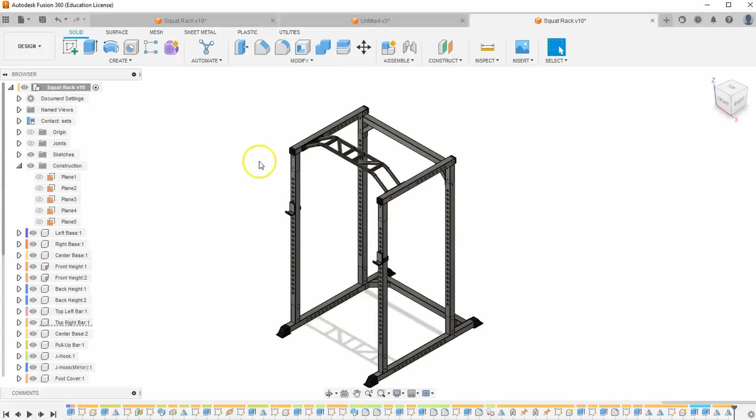Now, before we get started and just start building a bunch of bolts and nuts, if we check our PDF, it actually tells us the exact size of the bolts we need. We need M10 bolts. And we don't have to make that. We can just insert it. So let's go to Insert. And let's go to McMaster-Carr Components. And let's select Screws and Bolts.

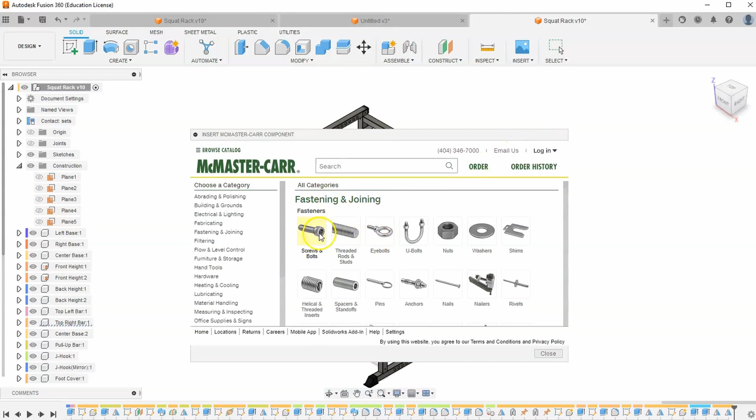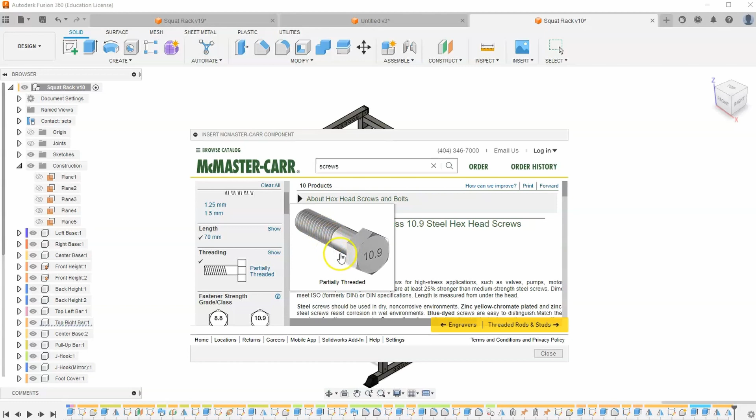And scroll down to Hex Head Screws and select Metric. Then we can just select M10. For the length, let's select 70 millimeters. And we're going to select partially threaded because we don't need threads all the way through, only at the end. And then let's just select the first one we have. And make sure the type of file that we download is a 3D step file, not SolidWorks. And hit download.

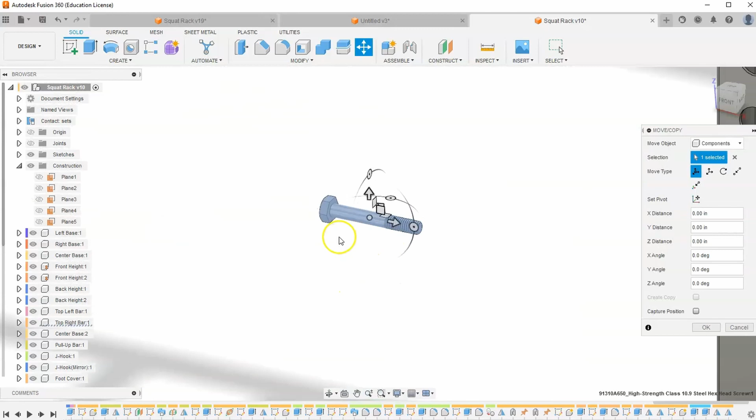And the file automatically inserts, and it is built correctly. Hit OK. And so then I'm going to go to Joint, and I'm going to select this end of my circle, and I'm going to place it in one of the holes here. And let me go around to the other side, actually, right here.

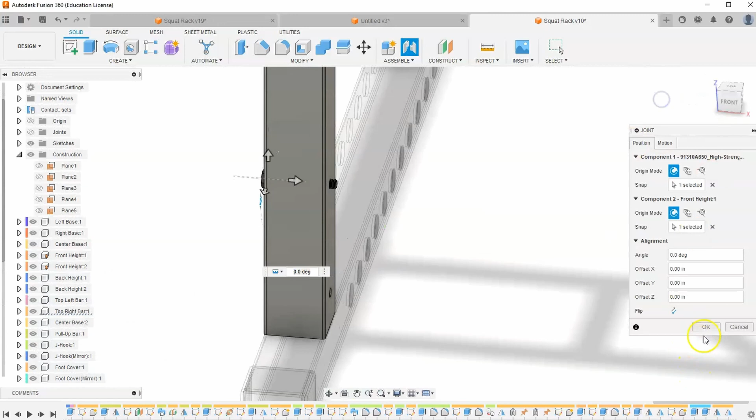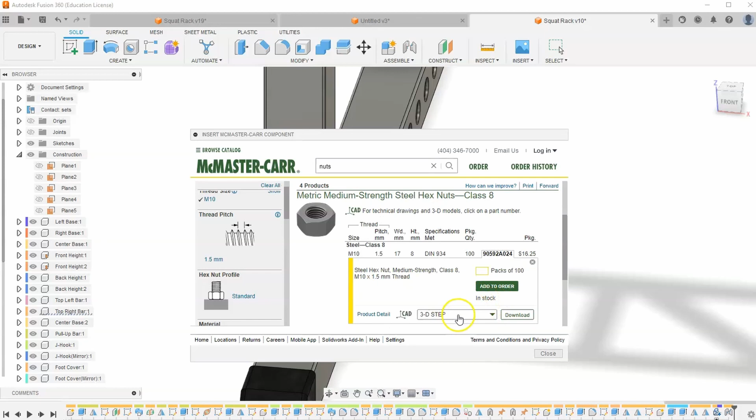And hit OK. And then we need the matching nut, so let's go to Insert, McMaster-Carr Components, and let's go to Nuts, and Hex Nuts, Metric, once again M10, and I think we can just select the first one from here. So make sure it says 3D step and hit download. And then the same thing, just hit OK and go to J on your keyboard for joint and just select that center circle and select the center circle here as well. And hit OK. And so we have the first one.

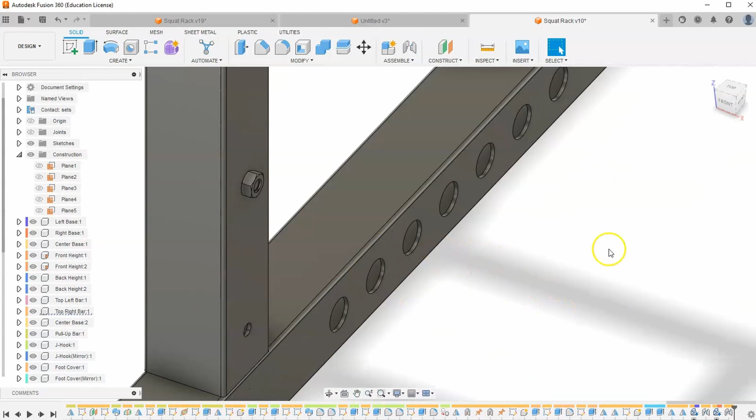And instead of doing that over and over again, let's go to Move Copy. And let's scroll down to these last two components in our browser and select them both by holding Control on your keyboard. And then make sure you select Create Copy. And then grab that up arrow and drag it down -5 inches. And hit OK.

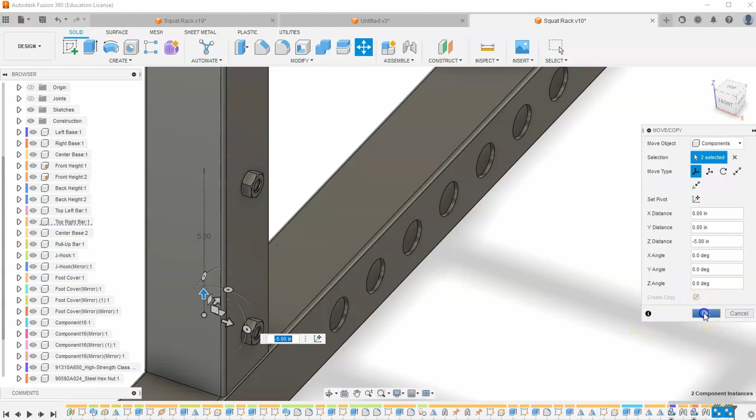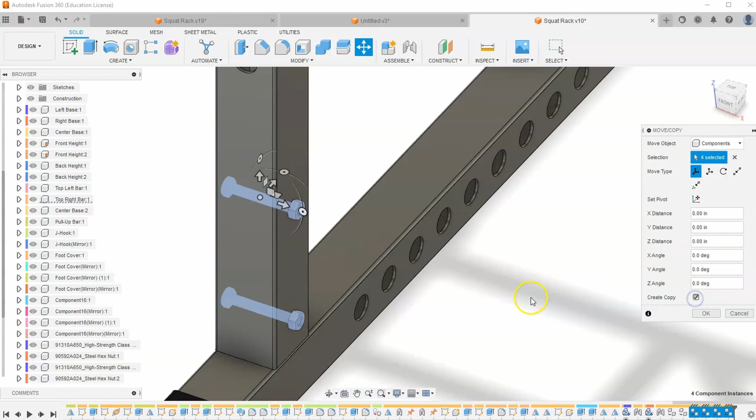And then scroll down a little bit more in your browser, and we can just select the bottom four by clicking the first high strength, holding Shift, and selecting the very bottom. And it should select all four. And once again, hit Move Copy. And once again, select Create Copy before you start moving. And if you don't hit Create Copy before you start moving, you have to start over. It won't let you create a copy after you started moving it. You just have to hit Cancel and then hit Move Copy again.

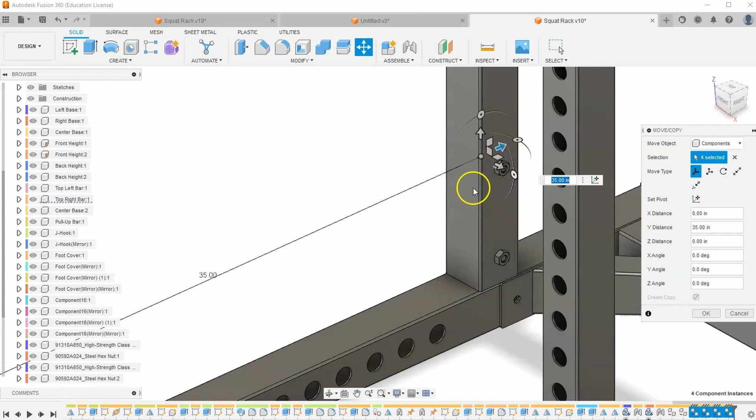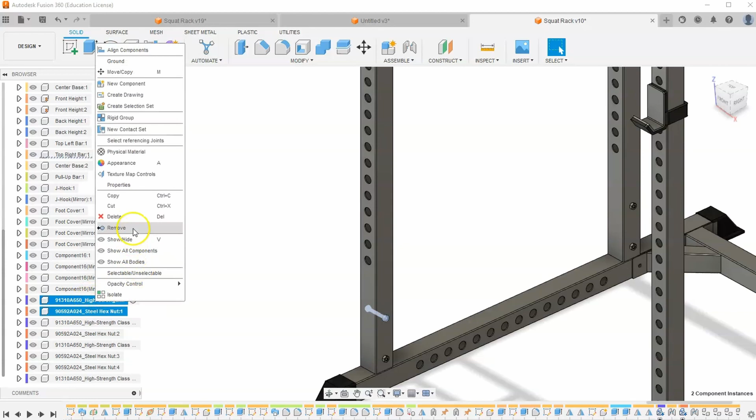But we drag it to the right here until we hit these holes, and that distance apparently was 35 inches. And hit OK. And then what else? Well, we also want some up here for here and here. So we can do that real quick. But the move copy is going to be a little bit complicated. Let's just select a bolt and a nut randomly here. So I'm just going to hold Control and select both of these. Right-click, Copy. And then I'm just going to right-click, Paste. And let's drag it out and hit OK.

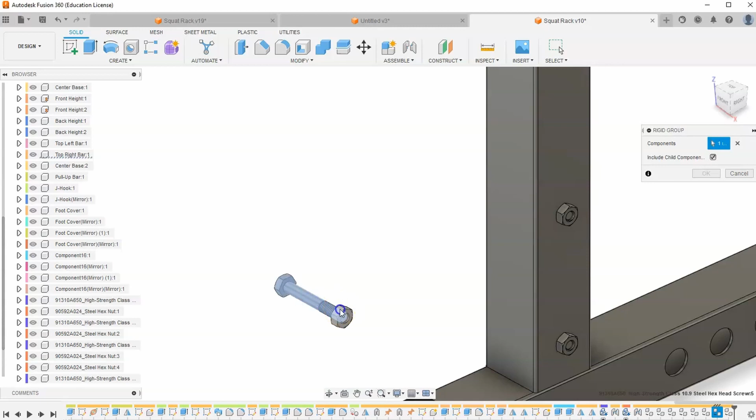And then I want to keep these two together. So how I'm going to do that is I'm going to go over to Assemble and select Rigid Group. And I'm going to select this bolt and this nut so that they're always stuck together, forever and always. And hit OK. This way, if I move it, they move together. I'm going to hit Revert. And I'm going to go back to Assemble, go to Joint, and I'm going to select that circle. And I'm going to tell it to insert right here at this circle. And hit OK.

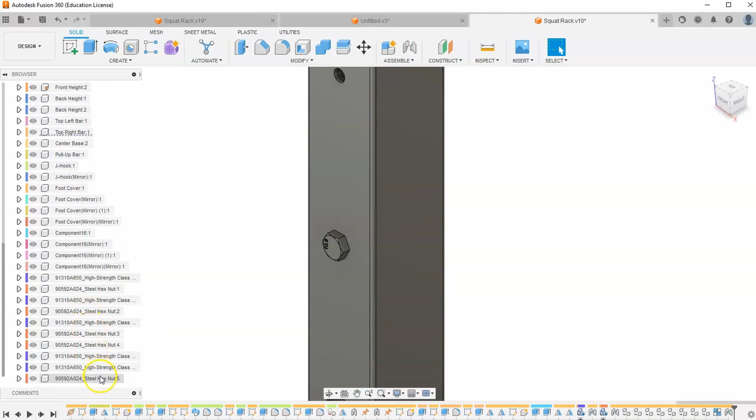Then I can utilize my Move Copy. I'm going to scroll down in my browser till I get to the last two files. And I'm going to select Move Copy. Make sure I select Create Copy and drag it up 5 inches. And hit OK. Then I want to mirror these two across. And if you haven't noticed, I'm not doing the same method every time. I'm doing whatever I think is going to be the most efficient for the specific part that I'm trying to do. So in this case, I believe it'll be a mirror.

So I'm going to go to Create Mirror. I'm going to select the last 4 components by holding Control and selecting all of them. And then for my plane, I'm going to scroll back up to that first construction plane that we used in our last video. This one right here. And hit OK. And that should give me 2 more bolts and nuts mirrored across the plane.

Okay, and then where else do we need bolts and nuts? It looks like we need some on this, so we can do that pretty quickly. Let's go to Move Copy, and let's see here. I want to select this piece and this piece. Make sure I hit Create Copy, and let's drag it down, and then in, and it looks like it's actually too small. You see how it's going into that face there? It's actually not the right size. And it is fit on the exact right size over here. And if you think about it, that makes sense because we do have this extra bar here. And so let's hit cancel.